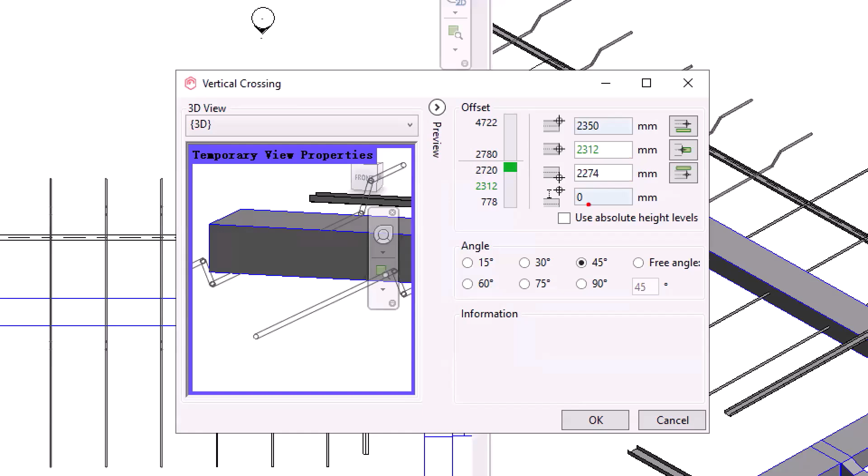And here, if you notice, the pipe is close to the duct side, but in the real project we should have a tolerance or space between them. So here we also have this kind of setting in this dialog. Here is the tolerance, so I can input some value here, for example like 50 millimeters. That's the tolerance. Then update and check the result again.

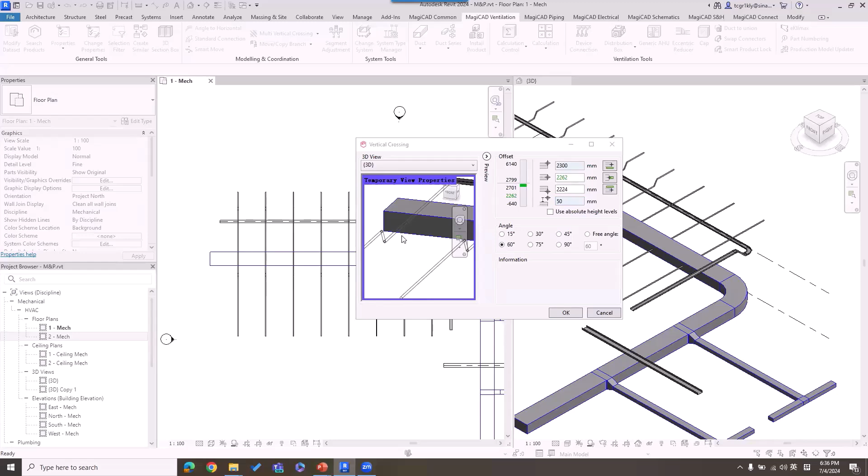You will see we have this kind of tolerance. And in this dialog, you can also switch different angle solution. For example, currently the angle of bend is 45 degrees, but I usually use like 60 degrees. You just need to switch to this one and check the result. If it is correct, then click OK, and we can check the result in the 3D view like this.

Okay, here is the pipe. I make a crossing, under the duct, and also leave some space here. So that is our function of vertical crossing.

And we also have this function in other disciplines. We have this function in ventilation, and you can also find it in the tab of MagiCAD piping, and also in the tab of MagiCAD electrical. We have a lot of functions in different tabs. So that is our function of vertical crossing.

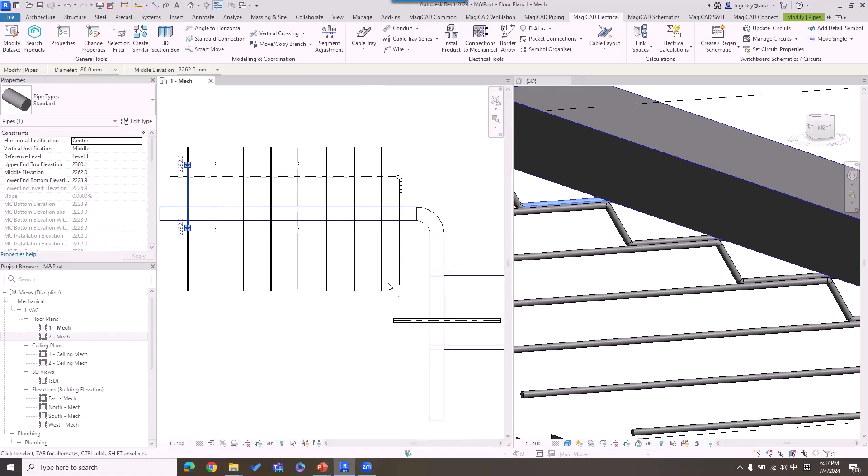And we also have this function for segment adjustment. So here, if I draw something like this - here I have a cable tray, but it is a reference one.

And I draw some pipes in this view, like this. Draw pipe here and duplicate one like this. So I just draw some pipes and I create a section view like this.

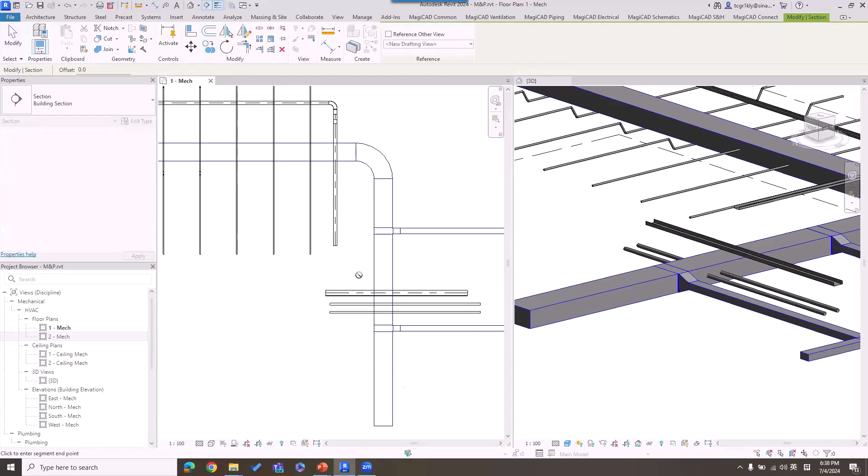And go to the section view. Here is the plan view. Here is the section view, plan view, and the 3D view. And if I want to change the place or offset of the pipes and align to the existing cable tray,

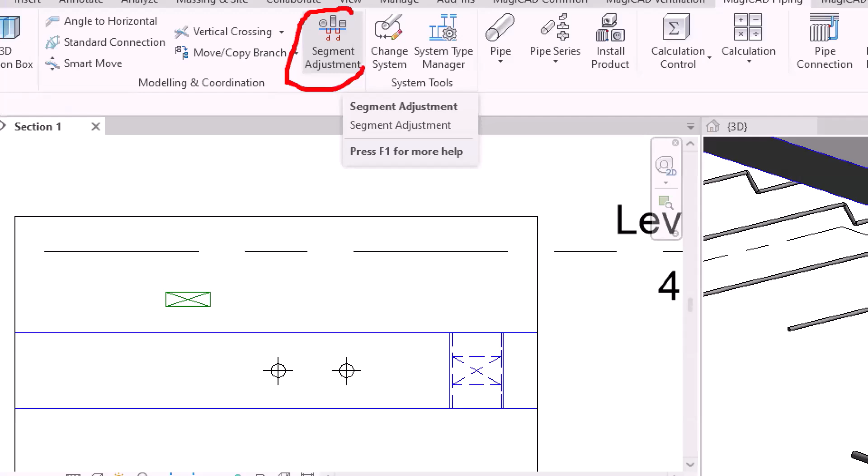so here we provide this kind of segment adjustment function. Here you can find it in the tab of MagiCAD. The segment adjustment, we can do like this.

For example, I want to move the two pipes to align with the cable tray and align with the bottom level, and also I want to move the place close to the cable tray. So I can choose like this and define the distance between each other, select the reference one, select pipes, finish, then done.

So here is our segment adjustment. It's quite useful for your real project because you can just draw some segments and then use this function to make alignment. That is our function of segment adjustment.

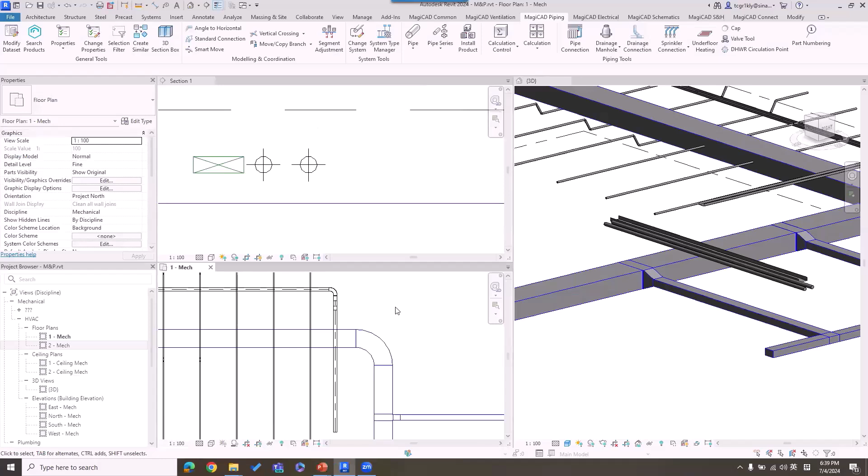The third one for productivity tools is change property. It is also quite useful. For example, in this case, there are some branches, and I use T as a connector, right?

But in the real project, maybe you want to change it to a tap. In plain Revit, you almost cannot do that - you can only remove the branch or disconnect it, then change the duct series and connect it again.

But with MagiCAD, we can do like this. We have this change property here, and I want to change ventilation and branch type, from T to tap. So here we have two directions: one is tap to T, the other is T to tap. Currently I want to change T to tap. I select objects like this, and finish, then done. So we can do this by one click.

And we can also do some other kind of change, for example add insulation, because here we have different duct sizes - one is smaller, like 500 times 300, and the other one is bigger, like 1,500, something like that. And I want to add insulation for them.

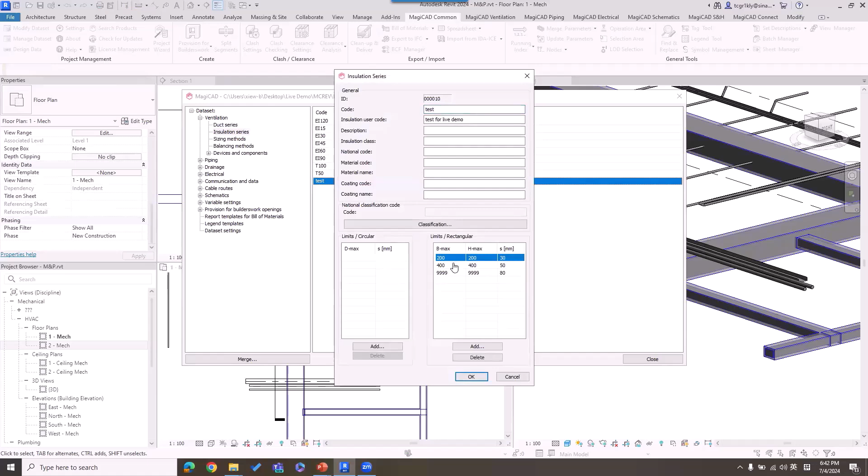And why do we have this kind of insulation with different thickness? Because we have this kind of data set, as Yang mentioned. Here you will find the regulation, for example like insulation series. For this one, you can see I have this regulation: with this size, the thickness of insulation is 30 millimeters, and for this one it's 50. For the bigger one, it's 80 millimeters. So we have this kind of regulation.

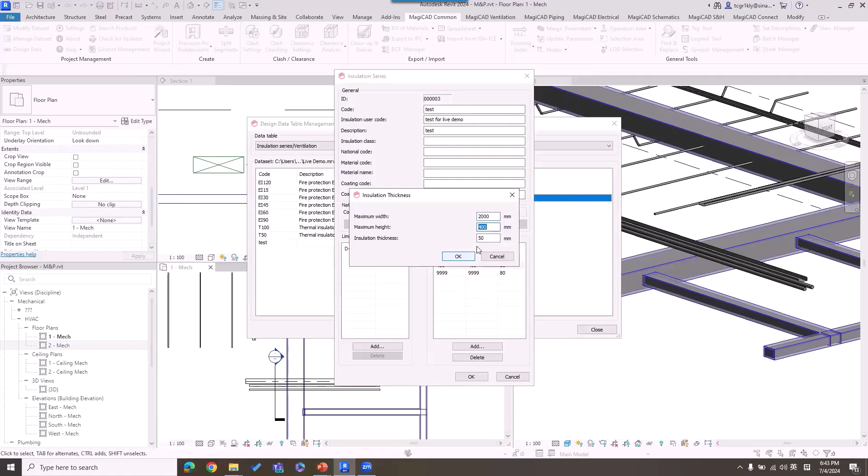And if you change the regulation, for example I change the regulation here, like this one, maybe for example like 2,000 millimeters, something like this. I change something here, and I use MagiCAD change property again, like this - insulation, okay, and then check the result again. If you check this one, the thickness will be smaller, like this.

So that is our change property. That means you can change something after drawing, not before drawing. Because with plain Revit, you always define something before your drawing, but with MagiCAD, you can change something after drawing. So that will make your daily work faster.

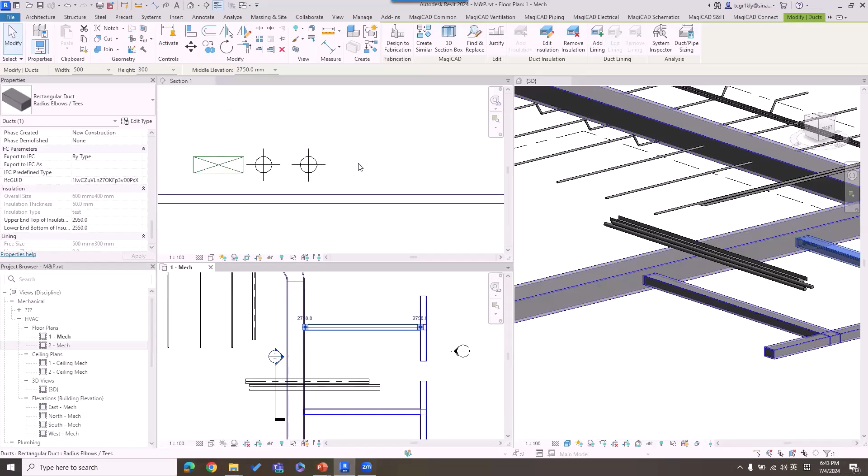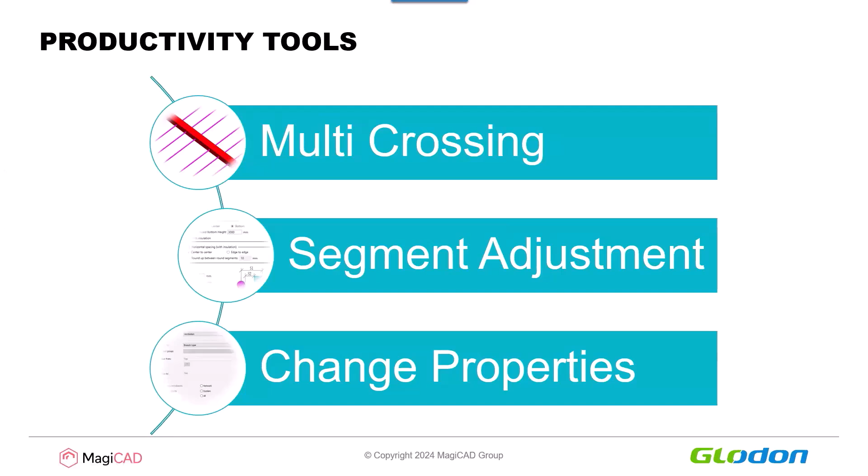So here is our productivity tools. We went through multi-crossing, segment adjustment, and also change properties. So that is our productivity tools.